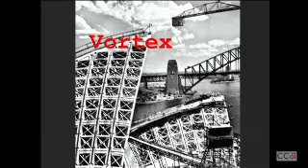The ideas that I've discovered over the years working in this field organize themselves around a number of concepts that actually, for me, began through my exposure to literature as an undergraduate and thereafter, and in particular the work of Ezra Pound and the concept that Pound used often of a vortex.

The idea of a vortex in his case was a historical idea which represented what he saw as key moments of, in fact, collaboration in a sense, though he didn't use that word, but moments where there was a convergence of opportunity and talent that made for a significant difference in the course of art and literature.

And I've often found that successful projects have that quality of serendipity in a way, where it just so happens that lots of elements come together in a magical way.

Pound used as an example in architecture this notion, the Tempio Malatesta in Rimini, which was a significant work in the Renaissance history. It was designed by Alberti, but it also incorporated the work of a number of very important artists, and in itself was quite unusual because, if you can see here in the image, it was effectively a wrapper around an existing Franciscan church.

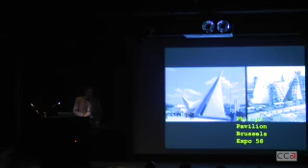A more contemporary or recent example, which I think bears some of the same conditions, is the Philips Pavilion that Le Corbusier designed for the Expo in Brussels in 1958. And there's actually a fantastic book written by Marc Treib on this project a number of years ago. And it's fascinating because of the collaboration, somewhat difficult collaboration, between Xenakis, who was then an architect before he became a composer, and Corb, who was very busy with Chandigarh and so not always around.

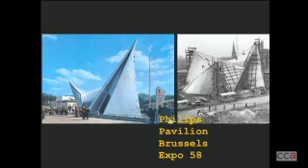Xenakis, I think this is what Treib implies, pretty much designed the form off of that plan notion, and was convinced that it was possible to make this in some kind of tension structure, and the little model on the right was his model. In the end, though, they went through quite a number of trial and error back and forth with contractors. They first worked with Eiffel, the successor firm of Gustave Eiffel. That didn't work out, so a steel structure wasn't happening. They gave up pretty quickly with the idea of tension because the shape really didn't lend itself to that.

Finally, they found a Dutch firm that figured out how to make this shell by casting a series of blocks, tiles almost, on a sand dune that they built to the shape of this hyperbolic surface, and then transporting those tiles and erecting them on this wood scaffold that you see on the left there. So you have in the history the complex interaction between Xenakis and Corb, one which in the end really did not work out happily for either of them, and then the sequential experimentation that they had to go through in executing the thing in the end.

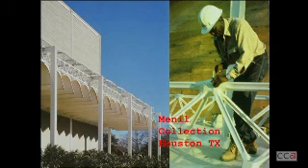Both are, I think, vortices in the sense that they have both this quality of convergence of talent, but also some of the complex and difficult histories. I think with the Philips Pavilion, it was not an entirely happy history, and maybe part of that problematic is it gives the intensity to the project.

A happier case is the Menil Collection in Houston, but also one which I think is significant because of the moment it occurred. You probably know the story, but initially the Menils had commissioned Louis Kahn to design a museum for them after seeing the Kimbell, which had been completed. He was developing the design for them and actually did a number of sketches that have been published since. Top lit. Together with the Menils, he came up with the idea that the art would be housed in a kind of treasure house and that it would be cycled through the galleries so that there was this combination storage and exhibition space, which was part of the notion.

Unfortunately, midway through the design process, Mr. de Menil died, and Kahn actually described the experience as having shown up at the house with a roll of drawings under his arm and knocking at the door and being told by the butler, terribly sorry, but Mr. de Menil is dead. End of commission. That was in fact the end of the commission for Kahn, and then several months later, unfortunately, he died as well. So the project ended at that point.

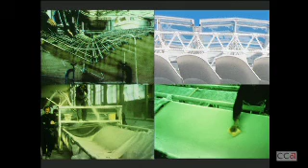And also, very important and part of the ongoing work that Piano and Rice did together was the notion of using a unique material and experimenting with that material. So in this case, the ductile iron that was used for the metal elements of these leaves and the ferro-cement that was used for the bottom part. Originally, they thought the ferro-cement was going to get made in Houston. Piano had a rather romantic notion that Houston, being by the water, had some thriving boat building business that he would be able to tap into.

Ultimately, they couldn't find anyone to do it. In fact, they couldn't find anyone in the U.S. to do it, and they found a British firm that did the ferro-cement leaves, but using a patent that came from the U.S. One of the things that Rice pointed out very often was that as the leaves were finished, it's a spray-on cement onto this net of wires, when they were finishing it, they brushed it, a different workman would brush it in different ways, and he could tell, looking at the way the light was reflected, which workman had actually worked on it.

Rice was fascinated with what he called the trace of the hand, and I was having an interesting conversation before here about what happened to the C in CCAC, and I think in a lot of the work that Rice did, there is this very strong Victorian Ruskinian conviction that seeing the evidence of the craft was very important for Peter Rice, and you can see that in the Pompidou and many other projects. So resisting the abstraction in a way that was very pervasive at that time.

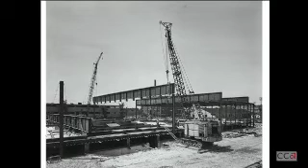Now, I think you can find in the work, too, the evidence of this kind of complexity and convergence. I think if you look at Crown Hall, there are some layers of meaning that are significant and ambiguous. This is a photo of Crown Hall under construction. If you look at it now, you come onto it and you feel very clearly the hierarchical organization of the structure. You have these major plate girders that are supporting the roof, that are supported on columns, and then adjacent to that, smaller elements which are clearly part of the cladding.

So there's a clear distinction between primary structure and secondary structure, and your feeling is that there must be a corresponding hierarchy in every aspect of the detailing. Well, it's not quite so simple. If you look closely at the details of how the mullions are attached to the channel member that creates the fascia all around, they're all welded on there. So there's actually no separation, and those mullions are functioning as a minor part of the structure, but still a part of the main structure supporting the roof.

In particular, when you look at the end, for example, here, this is the last girder. These members appear to be cantilevering beyond, so if you look here, the diagram would suggest that the roof is coming out to this point and then continues and reaches out as a cantilever. In fact, because of the way that the mullions are attached, the mullions are simply supporting the ends of those cantilevers, so they're not really cantilevering. So you have a lot of ambiguity in the way that the so-called primary and secondary structure interact.

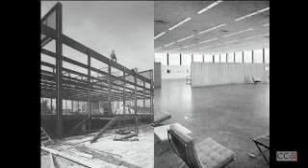Now, I think with that in mind, when you look more closely, and here you can see the weld connection between the fascia and the mullion, that ambiguity is very productive, that it makes the building much more effective and powerful. And if you look at it from the outside, you clearly see where the primary structure is and the secondary structure. But once you go inside, that all disappears. So when you look back, you can't find the columns anymore. All of these are effectively the same scale.

And if you look at the detail of the ceiling as it comes out to the end and turns up, allowing the light to come in, you really have this feeling of a kind of cloud of light all around this that's as if almost levitating the roof. So I think that ambiguity in the detail is actually consistent with the ambiguity in the visual effect as you go from the outside, which has this apparent hierarchical organization, to the inside where it all disappears into abstraction.

So here again, this is primary column probably, but still I think the scale difference between is such that you really can't tell, and it all looks like it's basically held up by the facade. A similar situation with the Beinecke that Bunshaft designed for Yale. It's a very simple, clear diagram. You've got a Vierendeel box, a rigidly connected grid of steel that's wrapping around the entire, what he called treasure box, which was containing the rare books. And it's supported very cleanly on the four corners by these little pyramid and bearing details.

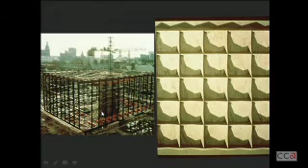Well, if you look at it more, there's this beautiful sort of collapse of the structure and the light shading and the skin in this, where you really can't tell them apart. If you look at it, the shadow pattern is reflecting actually the tapering of the structure that corresponds to the moment diagram, but also, as you'll see, the way the light comes through into the space. I don't think you can read distinctly the structure in this case as separate from the skin.

Now when you look at photographs of it under construction, you can see there's the grid around, and then the corner member is quite skinny, and that's because it's being held actually below, as you saw in this image, it's being held back from where the structure is. So, in fact, you've got this wrapper all the way around that's holding up the majority of the weight of the building, but the support isn't even under that wrapper. It's held back, and it's held back for compositional reasons to keep the overall relationship between the support and the box more

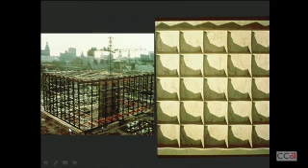feeling more appropriate. If you've been to Cornell, there's another building that Bunshaft did where the supports are actually out at the face, and it looks quite a bit clumsier. So I think by pulling them back, he got the right effect for the building, but in so doing, he completely contradicts the logic of the structure, and you see that in that very skinny corner element and that little cross piece there. So again, there's this tension between the way in which it's functioning, which is a strong part of its expression, and the way in which some of the moves are made.

Again, coming inside, you see the light coming through the marble, and then also, I think, you can sort of see it in here. You have the same effect of light, very bright light coming in below that you get at Crown Hall, giving the sense that the building is almost on a pillow of light.

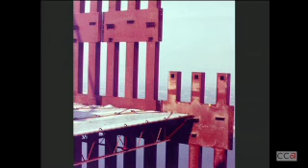Finally, in this sort of series of precedents, the World Trade Center towers of Yamasaki and the structural engineer Leslie Robertson is, I think, in a way, the best example of where tectonic and craft and abstraction come together in a very interesting way. As you probably know, the structure was all around the facade, a grid structure, tube frame, perimeter tube frame. So it made the building effectively work like a perforated tube with all four surfaces functioning as part of the strength and stiffness. Robertson developed an extremely sophisticated and original system for this.

Every element was thought through and customized. The facade was made out of plate steel welded into these trees, as they call them. The beams are actually just vertical plates without flanges because they're spanning so little that they don't really need that, and they're merged into the back plate of the box columns. These are access holes to make the connections with the stack above. Everything was very, very carefully crafted. And then also the panels for the floor were prefabricated with the truss and the slab integrated together, and so on. So it's a masterwork of invention and originality.

After 9/11, when MoMA organized a show on tall buildings that I helped with, I wanted to do something that would represent what I thought was the originality of this project. And with students from Princeton, we made these drawings which mapped the different types of steel that Robertson had used to make the structure. As it turned out, he used 14 different types of steel, much of which came from Japan actually, going from standard 36 KSI steel all the way up to 100 KSI steel, and deployed it in the perimeter structure in a very interesting and original way.

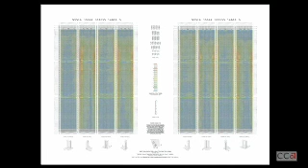This shows you the different types of panels of which the facade was made, or the perimeter structure was made. These are the different steels coded by color from the low strength to the very high strength in red. And these are some close-ups of the drawing that we did.

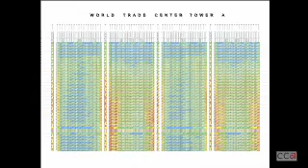So you can see the deployment of the different types of steel, again, is a design decision to move stresses around the structure, but it's also a reflection of that complex environment that was studied through the wind tunnel. To my mind at least, it's a very beautiful work of design and attention, and yet it's completely invisible.

Now, there's a quote that Wittgenstein used a lot, which came from Longfellow, which goes like this: "In the elder days of art, builders wrought with greatest care each minute and unseen part, for the gods see everywhere."

And I think part of the point here is a historical point about convergence of force and opportunity and talent. But part of it is also represented in what Robertson did for the tower, which is the intensity of invention that can be applied to something that is completely invisible. And that, I think, is a significant point to remember.

So I'd like to go now quickly through a number of projects that we've worked on, some of which from my office, some of which when I was working at Arup in New York, starting with the MoMA, to show ways in which I think these can be read perhaps in a similar way. At MoMA, we worked on the preliminary design with Taniguchi.

The final design was done by KPF and the engineers Severud Associates, and we, for the most part, were helping organize the geometry of the structure in a way that was as simple and clear as we could make it. So much of that is not really apparent or visible in the final work intentionally. Given the architecture of Taniguchi, it was definitely meant to be sublimated. But there are a few points where we did contribute that are still visible.

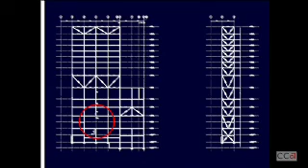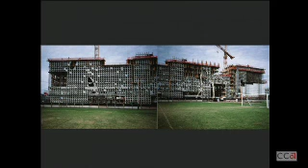This is an earlier project, the dorm at MIT that we did with Steven Holl. Steven was interested in trying to find a way to make the building as porous as possible, because it sits on the boundary of MIT to the city, and so big cutouts and openings in the design. He was also very interested in the idea of a sponge. And this often happens, and it's a lot of fun with Steven, is that there is this kind of metaphoric basis to the design, which opens a door to lots of interpretations from different perspectives.

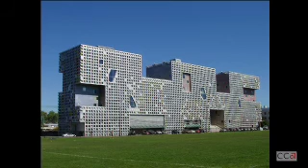So we took that on, and the basic gridding of the facade that went along with that, and developed a structure which was on the facade made of precast concrete panels. And so this is it under construction. So what you see on the facade is the grid of prefabricated concrete panels that make up that structure, which facilitates the spanning over these openings here, the double cantilevers in the corners, and so on.

And what you've also got here are these little spots where we also filled in, within the grid, certain spots in order to strengthen it where we had high levels of stress. So we started out with the uniform grid, and then we modified that grid to deal with the stresses. This is a view from the inside.

And so the panelization was 20-foot segments, 10 feet tall. The floor-to-floor height is 10 feet. So you get 3 windows per floor. So a student's room has a 3x3 grid here, 10 by 10 size. So you can pick whichever windows you want to open depending on your mood, and that's all made up of this concrete grid on the outside.

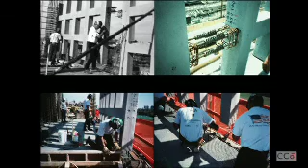Now, typically, it was hard to convince the contractor to do it this way. I mean, it was not conventional, and as often happens, so we worked with a fabricator in Canada, Bolduc in Quebec, who did a fantastic job. And in the end, it was so quick to erect this thing. This is always what happens, that initially lots of resistance. This is a ridiculous idea. Why would you want to do it this way? And then we sort of were able to convince everybody that it was economical.

We did it. It took them then like 20, 35 minutes to erect each one of these panels. It moved so quickly, and they needed so few workmen that they'd have to sort of wait around while the cast-in-place concrete that's on the inside of this building would catch up. So, of course, at the end, the contractor complained to me that we hadn't made everything precast.

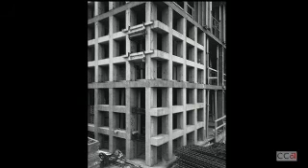And there you see the seam between the panels, which was cast in place, but these are some photographs under construction. And then the engineer was working on site. She had this drawing that she used to check to see that the rebar was correct in the precast elements before they cast the joints between them. And so she'd color-coded the different rebar.

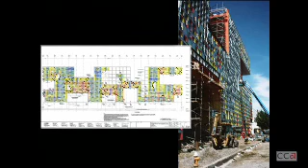And Steven wanted to find some way to introduce color into the facade. And so in the end, this formed the basis of that color. And so the color that you see in the facade corresponds to the diagram, which corresponds to the rebar, which corresponds to the stress levels. And so as you walk around there, you're seeing mapped directly on the facade what size rebar is inside. Now, clearly, there's an MIT student there somewhere, I'm waiting for him to call, that will catch the one case where we made it the wrong color.

But here you see the panels that are blocked in. So these are directly related to the fact that there are high stresses in this area because of that overhang. But it worked really well to wrap the building in this grid, because it really was a good basis to start from in handling all these different conditions. Plus, it was a very good backup for the facade.

So from a construction point of view, it made a lot of sense, because we put up the concrete, it became the interior surface, worked very well as thermal mass, didn't have to finish the interior, and then wrapped it with insulation and then the aluminum on the outside. So you immediately had the backup, everything ready. So ultimately it proved to be very practical. This is the final thing.

A couple of years later, also with Steven, we did the Nelson Atkins Museum. This was a competition which Steven won by breaking the rules. It was meant to put the building behind the existing museum, and he came up with a really wonderful idea of having it cascade down the side of the site facing out onto the park that had been designed by Dan Kiley and Jaquelin Robertson. So it very much embraced both the existing building and the sculpture garden that's in front of it.

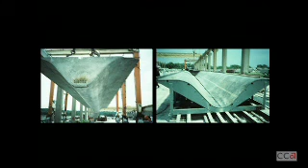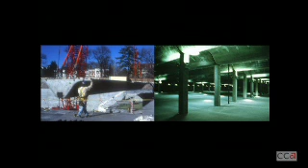And the nice thing about this was that we came up with the idea of supporting each one of these on its own column, so that when you went into the space, you really have this clear run of the corrugation of this roof above you. And one of the things that's extraordinary when you go here, and which was not entirely intentional, is that because of the drainage slope of the level above, which is the plaza and the Walter de Maria piece, you get quite a lot of variation in the height of the space.

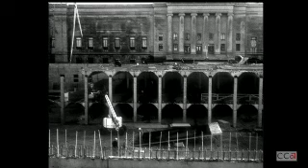So there's an amazing kind of Piranesian feeling of compression and opening up of the space between the floor slab here and this corrugated structure above. Works very well for a lot of people. I once got this very excited phone message on my answering machine from Thom Mayne, who had just been in here and thought it was the most amazing parking garage in the history of the world. It was, so it worked, right?

The other part was the design of these lenses, which are channel glass, frosted glass, 2 layers with a cavity in between. So actually an accessible cavity in between with catwalks and so on to maintain and clean the glass. And we wanted to keep the structure out of that glass zone. And so in all these lenses, the structure is concentrated down the middle. In the smaller lenses down further, we have these T's, kind of like masts, and cantilevers that hold everything up and that are just tied at the tips down into within the glass with small rods.

Steven explained to me the jury was a very prestigious jury. I think it was basically the Pritzker Prize jury at the time, and one of the members of the jury was the former director of the National Gallery, Carter Brown, who was from Rhode Island, Brown as in Brown, and he, of course, was an avid sailor. And I had explained to Steven that the idea of this structure was like a mast, sort of standing there like this, and that you had this trunk and then these arms like this. And so Steven recreated that explanation in front of the jury for how the T structure of these lenses worked, and that immediately won over Carter Brown's vote, because it was just like a sailboat. Oh, yeah, I really like that.

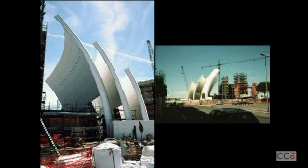And this caught on with the local engineers, many of whom were disciples of Pier Luigi Nervi, and so very attached to the idea of prefabrication and precasting and assembly that way. And also with the contractor Italcementi, which is the largest cement company in Italy, who were very excited about the idea of exposing the concrete. Initially, Meier wasn't very enthusiastic because he was worried about the quality of the finish, and so there was this back and forth for quite a while about how well the concrete could be made. By precasting it, I thought we could probably achieve a good quality. So given that principle, this is it under construction, and you can see a little bit the context here. Housing district, basically in the outskirts of Rome, a town called Tor Tre Teste.

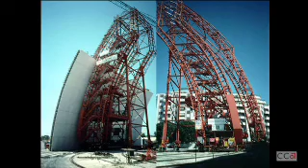Given this approach, the contractor, Italcementi, came up with this wonderful gantry, what we call the macchina, which was used to build this thing. And it's this gigantic gantry on wheels that would embrace each of the shells and build them step by step, and I'll show you this in a second. So this is it around one of the shells, I think the shallowest one, the first one. This is just before that, actually, and they're beginning to erect that, and you can see the tracks that

it moved on. So there were 3 sets of tracks, each of which brought it over the individual shells, and it basically did the smallest one first, and then they moved it to the next set of tracks, did the next one, and then the next one. And it was designed so that it would fit in between as well.

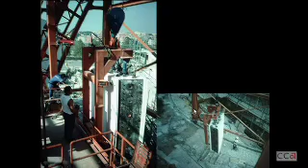So there was a platform, and then the units would be placed inside the platform and then lifted up to their correct position. This is a sequence here, so lifting it up, getting it onto the platform, and then putting into this jig, which was on a movable platform with actuators moving horizontally back and forth, and then it was also able to tilt and turn.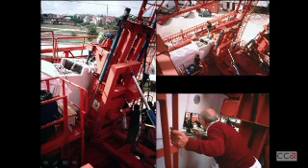So it was a full multi-directional control, numerically controlled off a computer next to it, and able to position it following pre-programmed requirements for each shell. So the position had been programmed, so the jig was basically moving it into position, and they really only needed 3 workmen to do this. This guy with the sweater here, no hat, and then the other guys. They would put 2 up every day.

So the morning, they'd get 1 in place, and then it was time for lunch, and then coffee, and then the afternoon, the second one, and then time to go home. And it was great because it took forever. It took like 2.5, almost 3 years to build, which meant I could go to Rome every couple of months during that period of time.

But it also meant that for the community around it, and particularly the children, I think, seeing this machine moving back and forth and slowly in a kind of Gothic way erecting this thing was part of the meaning of this church, and it is beloved by everybody, and I'm sure it's because of the structural system.

Here you can see the division of the panels. The post-tensioning holds it all together, so it's clamped together with cables vertically and horizontally. And actually, going back to this, you can see these are the ducts for the horizontal cable. These studs and plates make up the joint area when grout comes in to seal that joint, and then also vertically, here you can see him adjusting the post-tensioning rod.

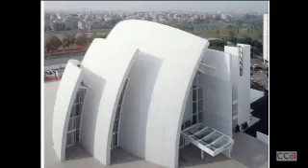if you're in Rome, don't miss it. It's a bit of a trek to get out there, but it's definitely worth a visit, and very popular. Everybody wants to get married there.

The Patent Office Building was a competition that we entered with Harry Cobb, which we didn't win. Foster won this competition and actually executed a beautiful roof that's there now. We had this notion that the character of this space in the Patent Office Building in Washington was really historically made by the presence of these two great trees. And so we wanted to come up with a design that recreated the effect of the trees and used them actually to hold up the roof.

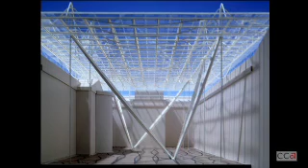The roof also needed to be independent of the existing buildings; the old masonry really didn't have the capacity to support the new weight. Structurally, we developed a strategy which was based on taking the moment diagram on a two-way grid, which you see here, and then using that to form a distorted grid that would follow that pattern in such a way that if you put post-tensioning through those lines, so if you imagine those red lines being hollow tubes,

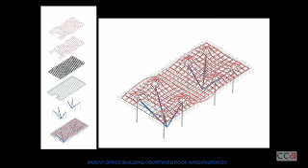that if you had a flat grid, and then around that flat grid you had this structure weaving in and out, when you post-tensioned those lines, you would effectively balance the dead weight and be left with nothing but compression in that grid. So it was a representation of the stress diagram, but also a kind of activated bubbling surface created by that concept.

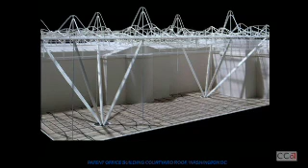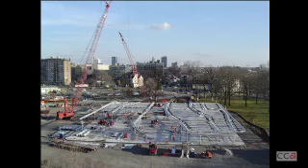The vertical structure is all contained within those cavities and made up of 3-inch diameter solid steel bars. The roof is very thin, and so the challenge was to squeeze the structure as much as possible. We ended up with a 12-inch thick structure spanning in some places up to 60 feet, and we got that by using a two-directional grid of all rigidly connected girders and beams.

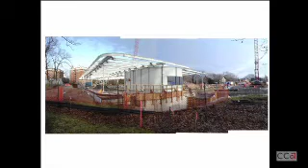So the girders, which you see going in and out here, are rigidly connected along their length, and then the beams in the other direction, spaced 8 feet apart, are also rigidly connected to those girders and to each other. So you have a kind of blanket of rigid steel up there dealing with these spans. Of course, the integration was complex, getting all the piping and everything through. Everything had to go into the same space, so a lot of time was spent.

This was not a BIM project. We just figured it out by hand and elevated all the beams. So on our drawings, we showed every single hole, and it worked out. But there you see some of the conditions. And here you can see in the corner there, that's a connection of one of those columns. It's a pin connection so that the column is free from the roof, so when the roof moves, it doesn't put some bending into the column.

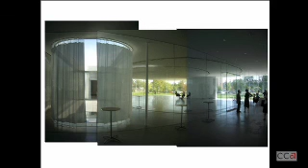A lot of coordination had to go in just keeping in mind the thickness of the gusset plates and the bolts and everything, because glass in some cases had to go right by underneath within quarters of inches of where those bolts were. But the effect in the end is quite good. I think that you can see that the structure really disappears. So the thinness, but also the way in which it is slightly disordered in its arrangement, you completely lose track, and you feel like this basically is held up by the glass.

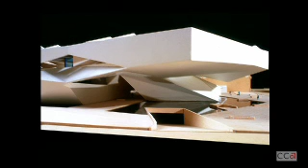We've done a number of projects recently with Michael Maltzan. This was in Fresno, a museum project that is pending still, basically this volume up in the air on a limited number of feet, which we developed into a series of intersecting trusses, creating the rooms of that space.

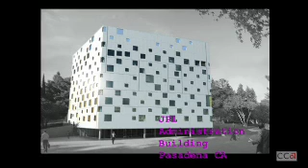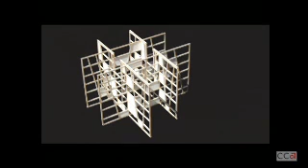And then more recently, the administration building for JPL, where the structure is essentially a crisscross of two lines in each direction with what Michael was calling a confetti of trusses, of diagonals scattered in between. And for an exhibition that Michael had in Montreal, we built a model in the office which represented the stresses in the structure through a somewhat complicated but I think attractive coding system to show how that was working.

This is a pair of bridges at Yale that were completed recently. The commission came through Cesar Pelli, who was advising the university and proposed that in replacing an existing pedestrian bridge, which had sidewalks, instead of having the new one with sidewalks, we would separate the pedestrian from the traffic. It's a fairly short span, about 60 feet over a canal that's actually been decommissioned, and it's now a bikeway. And so we had two bridges to do on either side of this new bridge, and it's in a setting at Hill House Avenue, which is quite beautiful and old, a lot of old houses there.

So there was a desire that this have a certain traditional feeling to it. And so we took inspiration from bridges that had been built in the Victorian era. This is at Regent's Park in London, which are sort of the typical lattice grids making up a girder. But here you can see, first of all, it has these stiffeners as well as the lattice, and then these outriggers that are used to stabilize the structure. In our case, what we tried to do was eliminate those by corrugating the web and using the corrugation as a way of providing that lateral stability.

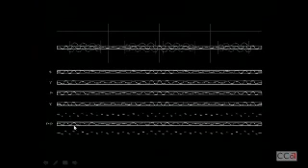This is the structure. Basically, that grid works as a Vierendeel. But here in plan, you can see there is a tight corrugation in the middle where it's stabilizing the top truss, so that Crown Hall problem of lateral torsional buckling, holding that top with the corrugation acting as a vertical sort of folded plate cantilever. And then at the ends, the corrugation works to keep the web itself from buckling under the high shears. So you get that variation from the tight, looser, and then tight again in the middle.

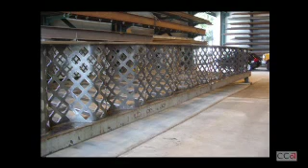This is a mock-up. The fabricator was amazing. He built a full-scale mock-up just to see whether he could do it. So it's available if you want one for your backyard. And everything was numerically controlled. I mean, obviously the cutting, but also the brake press used to bend these things, very tight tolerance, and especially a lot of attention to controlling the heat input in the welding, because it's very thin plate, 1/4 of an inch thick, so easily distorted if you don't.

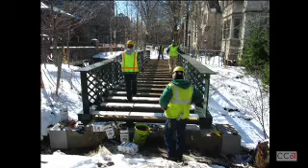This is it being installed, and it has a sustainably harvested hardwood deck. But you can see a little bit here. It's a little hard to photograph, but the effect of the corrugation, first of all, the way the light comes through is quite dramatic, but especially it gives you a much stronger feeling of the thinness, the almost paper-thin quality of that web.

I think this is the last project before I go into a little bit about the climate change stuff that we did. This was a theoretical project a number of years ago, which we were doing for the Port Authority, looking at the possibility of siting a new TV broadcast tower here on the tip of the Bayonne Pier. And we worked on a design that we'd initially done with Harry Cobb for an issue of the New York Times Magazine that Herbert Muschamp did in 2002. It was going to be sited right next to the stock exchange, but again, it was going to be a broadcast tower. And we developed this idea of a structure made of stems or straws almost, that would twirl past each other, creating a void space that was, in fact, the design.

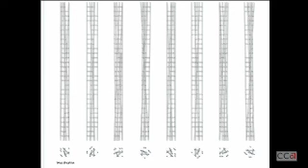So very much organized around the design of the negative space between the elements, and a space that would have a variable aspect as you moved around the city. So looking to achieve something that was quite different as you moved around and saw it from a distance. There you can see also the way in which it's tied together with a series of horizontal beams every 70 feet; the tubes are 21 foot diameter. These are 70 feet apart. And these were also intentionally left open, so they would capture all the stems as they moved around, but never entirely closed. So a lot of effort in maintaining this sort of sense of openness.

Now, from an engineering point of view, one of the things that we started to explore in the application at the Bayonne site was the possibility of trying to design the arrangement of these stems in such a way that we would gain some benefit from their position relative to the wind. And we took inspiration from some studies that had been done for suspension bridges, looking at the effect of the wind on paired suspension cables, which had discovered that, as you would expect, when they're far apart, they're basically independent.

When they're very close together, it's as if you had one. And it turns out if they're slightly apart, 3 diameters apart, the drag is actually less on 2 than it would be if you only had 1. So a somewhat miraculous aerodynamic effect. So there's a benefit to more, to collaboration, right? There's a benefit to 2 over 1.

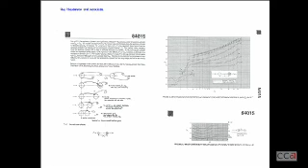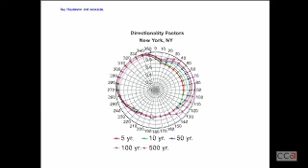So taking that idea, we wanted to develop a positioning of these stems in such a way that the drag would be least in the direction of strongest prevailing winds, which for New York, for hurricanes, is from the northeast. This is the wind rose for New York. So we did some work with wind tunnel, RWDI, doing some CFD, computational fluid dynamics studies, to try to see what various kinds of patterns would provide in terms of drag.

And then together with the engineer Ted Zoli, Ted came up with a very sophisticated calculation method using actually that original research to figure out ways to predict what kind of, we called it drag roses, would result from a particular arrangement of stems. And these are the surfaces of his computation. But effectively finding a way so that the least drag would face the greatest wind direction.

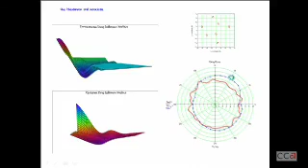And in a sense, you would then have a representation, in a way going back to what Robertson had achieved with the World Trade Center tower, a kind of representation of the environment within the characteristics of the structure. Now the last part I'd like to show you is the work that was mentioned regarding climate change.

This is a project that my wife, Catherine Seavitt, and I started a couple of years ago. We received a command. Our dean called us and said, "You will apply to the Latrobe Prize. You will figure out a topic." This is how it works, right? So we were sitting at the table, looking at each other, figuring out what are we going to do. Could we come up with something so that we actually don't get it? Because we really don't want to do this. Got enough on our plate already.

So we applied with the idea actually inspired from that tower project and the positioning of that tower project. It got me thinking about how this body of water in the New York area was really under-realized. People didn't understand and didn't think about it as a place in the region. So somehow we came up with the notion of trying to redefine that place, and the problem of sea level rise, and figured out a way to combine the two together and applied. And in fact, we didn't hear anything back, so we were hopeful that we might not get it.

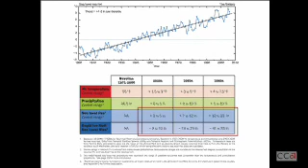So the initial premise was to take this place, which we defined as a sort of Dr. Seuss looking figure, which we became quite obsessed with. Beautiful, isn't it? And identifying this as the place that we wanted to work with. The problem of sea level rise, which is on the order of 2 to 3 feet in the next 100 years. The current problem of flooding, and you heard about that recently with Hurricane Irene. Clearly the mayor decided to react as forcefully as he did to that hurricane because of the MoMA show.

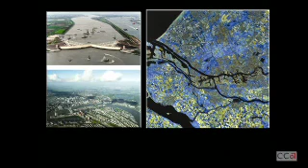But these are the flooding patterns that are predicted now without taking into account sea level rise. So already we're quite vulnerable even to Category 1 hurricanes, which is the red portion here, and especially for the higher hurricanes. Now, one strategy to deal with this is to block it off, and there's a very good group of coastal engineers at Stony Brook, State University of New York, who have developed a strategy based on putting barriers in these locations which would keep the water out of the inner harbor, using basically the sort of Dutch approach of big gates that would be deployed in the event of a major storm.

Our strategy wasn't so much to deny the possibility of those kinds of hard infrastructure approaches, but to say that at least there ought to be, alongside that, or maybe replacing that, what we call a soft infrastructure approach, which was effectively the use of all kinds of different strategies to dissipate the energy of storm surge. So basically barrier reefs, barrier islands, ways in which we could reduce the impact of the storm, but not necessarily try to block it entirely. And so this included islands and various treatments around the edges. So big islands in the middle, in the shallow areas of the bay, and very small islands along the edges, all with the intention of sort of roughening up the edges and creating obstacles in the middle of the bay.

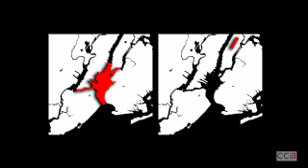We were also, and this is sort of the duality of the strategy, trying to define a new center, a new void in a way, that would have an analogous impact to the effect of Central Park in the 19th century. If you look at images of Central Park as it was being developed, it was a void inside an emptiness. There was none of the definition that you have now with the city that has grown around it, and it created, though, that clear space around which the density and concentration of the city would organize and became, as it is now, this amazing public space for Manhattan. The water can be a place like that, and Venice shows that the water can be occupied, can be a public space and a public place as much as land can, and so our inspiration was very much the basin of St. Marco as well.

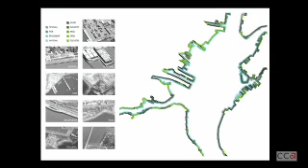So in the research work that we did with students, and a number of them are here actually, over a couple of summers, we mapped the edge, looking carefully at what the existing conditions were, looking at the fact that the edge had varied over time. This is a superposition of the edge over the course of about 80 years, and it's extremely dynamic, and yet there's quite a conservative attachment to the way it is now. The environmental groups and other groups really trying to fend off bad things, which have happened all too often, have also become extremely attached to the condition as it is today. And this was trying to loosen that up a bit and show that a certain dynamic aspect of that was manageable.

We developed an atlas of the bay using various aerial photography and others to identify the edge conditions and start to map actually the height of seawalls and other conditions, and also overlay on that the flooding that would happen, the 500-year flood and the 100-year floodplain. And keep in mind that with sea level rise, essentially what happens is that what is now the 100-year floodplain becomes more like a 10 to 30-year floodplain, and the 500-year floodplain becomes effectively the 100-year floodplain. So the issue here is not only the storm, but also the increased flooding. And we have an extremely inconsistent design of the boundaries. There are places where there are seawalls, but then right next to that there's nothing, and so the water can obviously find its way around. There's no coordination. This takes you, as you can see on the upper left, across our atlas.

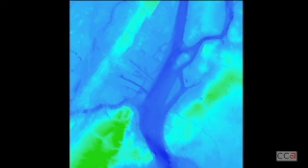So the purpose of the atlas was to begin to define what was there, both as a setting for new strategies, but also to facilitate the creation of a digital model. This is the bathymetry, the underwater terrain, and then combined with the topography was used to do some numerical simulation, but also to get us thinking about the continuity of the space of land and underwater, trying to break down this notion that the waterfront is somehow a hard edge. A number of tools that we'd used on earthquake engineering projects, actually some planning projects we'd done a number of years ago. We had a database of all the buildings in New York, at least, and started to try to develop one in New Jersey, which we could use to look at the consequences of various scenarios in terms of damage or reduced damage to the existing built structures.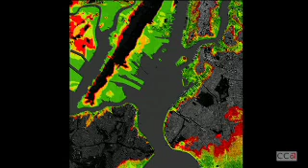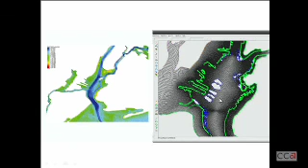This is from the fluid dynamic models that were made to try to study the effect of putting islands in the way of the flow. This is the model on the left that was developed by colleagues in the civil engineering department at Princeton, working with, again, a sort of abstract representation of our island idea.

We actually got our very own custom hurricane generated by the Geophysical Fluid Dynamic Lab at Princeton. Brilliant student who's now at MIT. She took Hurricane Isabel, displaced it over, and then modeled the track of the hurricane coming in to New York as a way of generating the storm surge, so getting the input of the storm surge coming into our model for the bay. So trying as best we could to come up with a solid foundation for some of our arguments. And here you can see this is what it says here, all island, and above that New York Isabel.

So the magenta is with islands and the blue is without islands. You can see the storm surge is the same. You're not going to stop the water unless you stop the water. So we're not saying that we stop the water. We let the water come in, but the effect of the islands is to reduce the velocity. This is mapping the velocity. So by reducing the surface wave velocity of the water, we're reducing the energy and we're reducing the damageability that results from that. That is our theory.

Now it turns out that we happened on an area of science which is totally underdeveloped, and so we've sort of identified an area that needs a lot of work in computational hydrodynamics in getting a better handle on what happens when you let it go. We do a really good job with river modeling and oceanfront modeling when we have a hard barrier, and we can treat the San Francisco Bay as a bathtub. We know what happens when the water flows in and out, as long as that edge is hard, because we're used to hard edges. That's the way we like to engineer it.

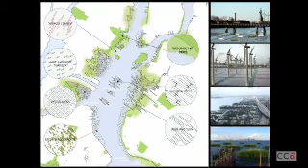So these are some maps of the design, including some suggestions for transportation inspired by Venice. I think the mental map of a place has a lot to do with the transportation system. If you think about Venice, the different vaporettos have different circuits, and when you get used to it, you start to think of the city as accessible along these different lines, that either bounce back and forth along the Grand Canal or go all the way around. A little bit like the subways in New York, which map the city for you in a sense.

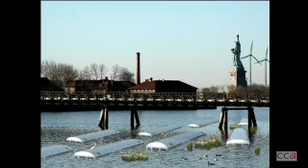Some images of parts of our proposal. The statue looks great next to these wind turbines. We currently export subway cars for reef making off of New Jersey. We should keep them, use them ourselves. These are islands of wetlands. Wetlands are going to be submerged by the rising sea level, and so the barrier islands can, in fact, become replacement wetlands. And then this is a beautiful design that ARO did for Lower Manhattan, showing how this system of barriers could look.

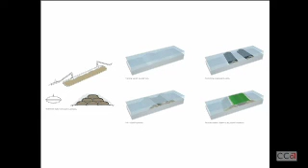We're actually starting a project pretty soon with the Port Authority, who's gotten very excited about this, and wants to reuse dredge materials in this fashion to test making islands. These are some of the studies that ARO did, looking at a little water table to generate some formal ideas, which they then turned into this design.

And then finally, I'll just briefly show you an exhibition that we did not this summer, but the summer before, in Venice. Jonathan Solomon was organizing this and asked us if we would present our New York project, and it was kind of simultaneous with the MoMA show, Rising Currents, so it seemed a little strange to just show that by itself in Venice.

And so we teamed up with friends at Louisiana State University and came up with an exhibition based on the juxtaposition of our project and ideas that they had for the reconfiguration of the Mississippi. Actually, no small plans.

Catherine Seavitt came up with the idea that we would make these side-by-side models that would express the continuity of topography and bathymetry that I showed you in the digital model, and then objectify the water as a separate element floating above. And so these two models on the left is the Palisade Bay, our New York project. On the right, the project for the Mississippi.

So this is again that computer model, which then was translated into this model that you see on the left with the water floating above. This was made in lightning speed by students at Princeton. The thing about the Venice Biennale is that they announce who's going to be in it like 3 weeks before you have to ship it, because of course it takes forever to get installed in Venice. So we had very little time to do this.

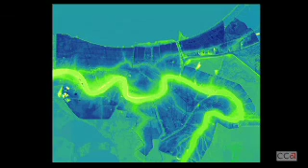Now, the project for the Mississippi was the idea of a coastal engineer named Bob Twilley, who was at LSU, and his notion is to figure out a way to redirect the water and the sediment from the Mississippi that's coming down at the moment through the channel and getting dumped off the continental shelf. You can see it there on the lower right, and find a way to deploy that sediment and water in such a way that it would do a better job of rebuilding the wetlands that are getting lost in the delta.

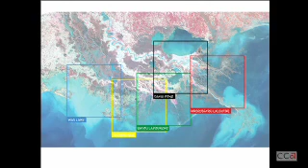And so we identified 5 different places where these diversions could exist, and these are rendered in the colors of the Olympic, the 5 squares of the Mississippi Olympics. As you know, the Mississippi has moved around over the years, but at least until this last century, when it was put under much more control by the Army Corps of Engineers. And so now it flows down this red line and out through what they call the bird's foot, and dumps all the sediment uselessly out past the continental shelf.

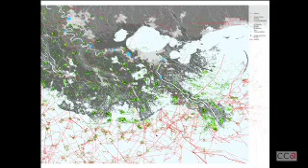Clearly, the key here is navigation, and so the tension is between maintaining navigation and finding ways to use the sediment more productively. These are just some maps of, this is the petrochemical infrastructure, which is totally at risk. So it's not in the interest even of the people that use this for industry to let it continue as it is, because it's putting all the infrastructure out there at risk as well.

So moving from left to right, Wax Lake is actually an existing diversion that is there now, which is working at diverting water from the Atchafalaya and building land quite effectively over the last 10 years. So an example of how this can work. This is a representation of how much land could be built over the next 30 years.

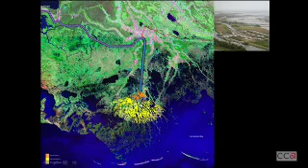This is moving over to Terrebonne Basin. This is the Intracoastal Waterway up here. So using the waterway as a way of diverting more water then down through a new channel that would come out here and drop sediment there. This is going through the Bayou Lafourche, which, like all the bayous, is an old path of the Mississippi. So trying to find a way to reestablish this as a channel. Of course, all this has huge implications in terms of infrastructure development and also impact on existing settlement patterns.

But it's a strategy, a visual strategy that's trying to put down a hypothesis that people can start working with, all on the basis that, if you don't do something about the receding wetlands, you lose the agriculture and fisheries that these communities depend on.

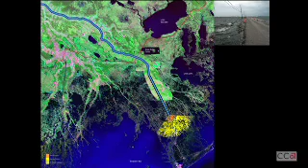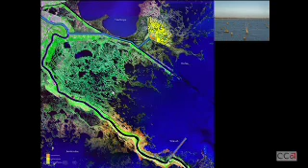Then this is Davis Pond right next to, and you can see the scale here of what we're talking about, next to New Orleans, again diverting water in that case, and then finally Bayou la Loutre out to the east. Now these are some diagrams that we did together with colleagues at LSU, trying to demonstrate what might be the regime for the plumbing diagram in a way, for what would happen under different scenarios.

So this is if you have 1.2 million cubic feet per second of flow coming down here at the Old River Control Structure. Currently, by law, 30% of it has to go down the Atchafalaya, 70% down the Mississippi, pushing that into various of these diversions following these percentage numbers,

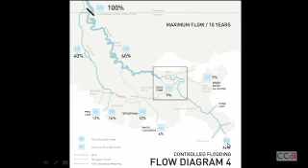and then shifting it with the higher flow rates of 2.4 million cubic feet in big events, shifting more of the water into the Atchafalaya, diverting some of the water before it gets to the bird's foot out into Bayou la Loutre and down into Davis Pond, so that the amount of water ending up at the bird's foot is lower, but still enough so that you maintain the navigation. And then finally, in an extreme case of 3 million cubic feet per second, taking 50% of the water, so quite a bit of water, over to the Atchafalaya.